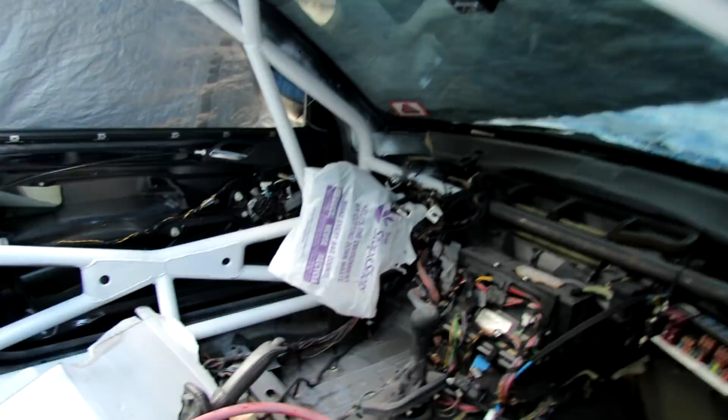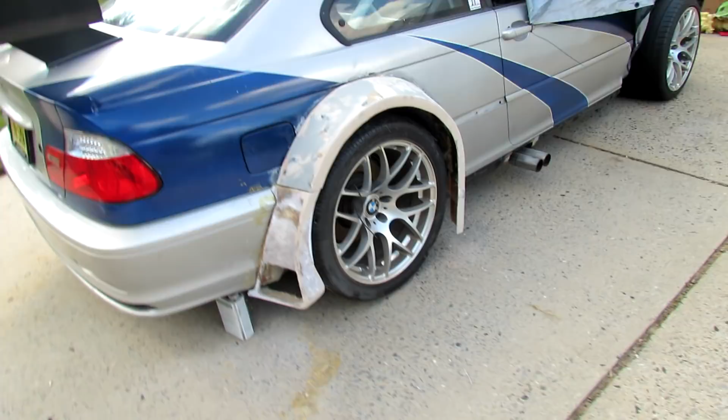So I have bad news, but kind of good news, but kind of bad news, but kind of good news. I think I'm just gonna scrap what I've done so far with the car, and I know that's a lot to say after what I've done, but basically a couple of you actually mentioned it about 3D printing. It's similar, but it's not the same.

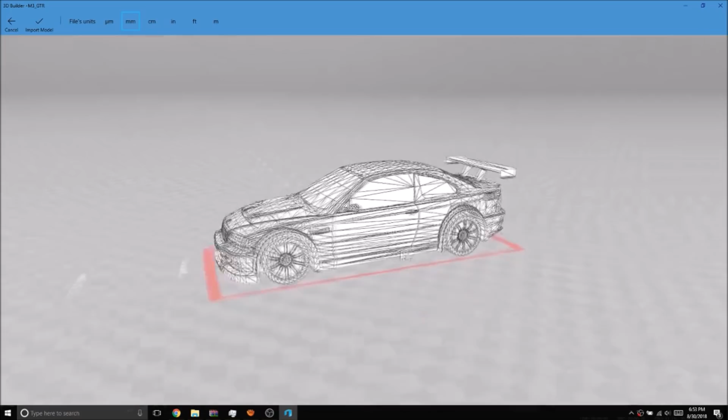What I'm actually going to be doing is taking a 3D render of the car, which there's tons of M3 GTR 3D renders, and I'm going to have it upscaled to exactly that, which it's already close enough, but we'll do it better.

Same wheelbase, same width, flares being the same width, and basically my friend is going to enter it in a CNC machine, with mil-spec foam, not like this crap, but like actual really fine foam that's meant to be cut through and shaped.

They're gonna make 4 fender flares, front and rear, a full rear bumper, and a full front bumper. And then I'm gonna get the foam in the mail, the block that looks exactly like the piece.

I'm gonna put wax and anti-adhesive promoter on the foam, but even before that I can actually sand the foam a little bit, because sometimes the curvatures aren't exactly perfect, but you just have to get it smooth, that's it, because it's polygon, so they're not technically curves.

After that I could put wax and anti-adhesive promoter to make the fiberglass not stick, put the fiberglass, once it dries, pull it off, and boom, we got a mold. Pack the fiberglass in the mold once again with wax, anti-adhesive, and then boom, we got a part.

So I actually do plan to have the first real M3 GTR kit that's totally accurate, because it'll be from a 3D render, which is actually a model imported from the game.

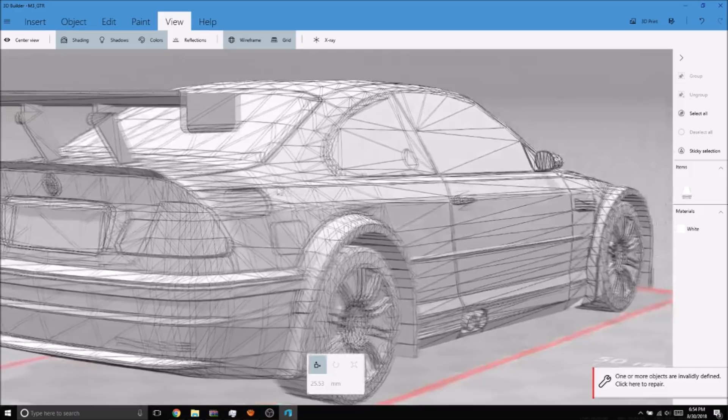There's this dude that actually originally did it, I think he modified it, and he did help me a lot with this. So Flat Hat 3D, I believe. Yeah, Flat Hat 3D. And it's awesome because he makes 3D renders of cars and stuff like that.

And it's pretty cool because he actually worked with me a little bit, and he made the model of the car a little bit more life-size, so it's super close now by using regular M3 dimensions.

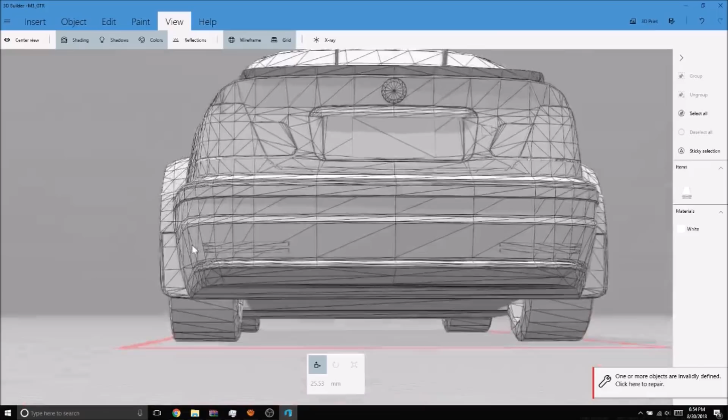There's actually a guy in Ohio who's a CNC machinist, and he's like, yeah, I've done a kit like this before, it's kind of time consuming getting the model, but since this car is pretty popular, it's easy to find the models because there's a million real M3 models already, so that's easy. But M3 GTR, there's a ton.

You just have to scale it up, and then he's gonna have to separate all the parts, the 4 flares, the front bumper and the rear bumper, and then that's it really.

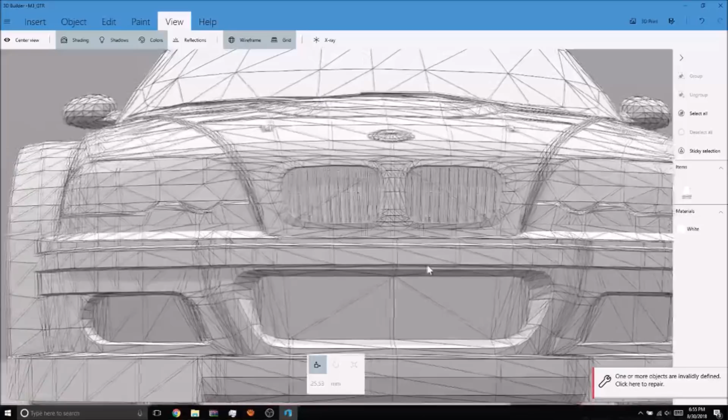It gets CNC'd into foam, we can get it, and I'm really hoping that I can get the foam in like a week or 2. That's what I'm really trying to do, so I can make the mold, because obviously I want this thing to have a body for H2Oi and everything.

I think that's the only way to really do this completely perfectly. It's awesome doing this from scratch, and hey, this is my first time ever doing this in life, and that's pretty great. But nobody's gonna look at that car at SEMA or anywhere else and say it's okay if it's not perfect because it's his first time and he did it all himself. It doesn't matter. You're gonna be comparing next to cars built at million dollar shops. So I want this thing to reflect what I can do, and I think this is the best way.

Like I said, I'm also going to be selling the kits. I'm truly a firm believer in giving people opportunity, if that makes sense. I don't like how the only M3 GTR kits out there are like $7,000 to $8,000 and they're not even accurate. So I'll be selling mine for a tiny fraction of that, because I want to give people who don't have money out their ass, like obviously me, a chance to actually get the kit.

No matter what, you can shape that thing all you want by hand, like Waker did for 3 years, but you will never get it as perfect or as symmetrical as a computer. It just takes too damn long, and this is the easiest way to do it. Then I'll just make molds and make the parts. I'll have all the molds here, so when people buy the kit, or if the front bumper cracks, I can always make myself a new one. So it's definitely the easiest way.